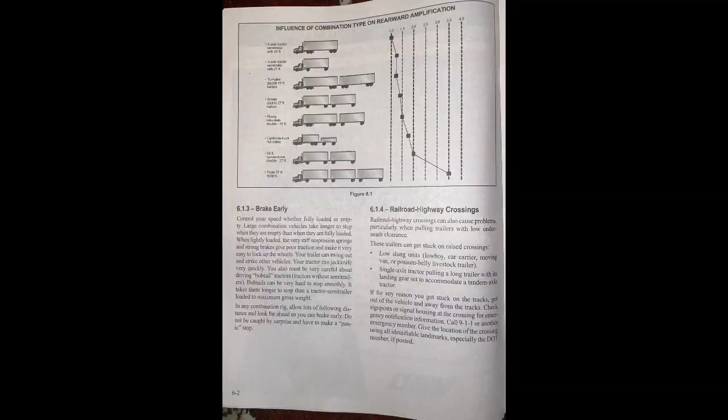6.1.5 Prevent trailer skids. When the wheels of a trailer lock up, the trailer will tend to swing around. This is more likely to happen when the trailer is empty or lightly loaded. This type of jackknife is often called a trailer jackknife. The procedure for stopping a trailer skid is: recognize the skid.

The earliest and best way to recognize that the trailer has started to skid is by seeing it in your mirrors. Anytime you apply the brakes hard, check the mirrors to make sure the trailer is staying where it should be. Once the trailer swings out of your lane, it is very difficult to prevent a jackknife.

Stop using the brake. Release the brakes to get traction back. Do not use the trailer hand brake, if you have one, to straighten out the rig. This is the wrong thing to do since the brakes on the trailer wheels caused the skid in the first place. Once the trailer wheels grip the road again, the trailer will start to follow the tractor and straighten out.

6.1.6 Turn wide. When a vehicle goes around a corner, the rear wheels follow a different path than the front wheels. This is called off-tracking or cheating. Off-tracking causes the path followed by a tractor to be wider than the rig itself. Longer vehicles will off-track more.

The rear wheels of the powered unit, truck or tractor, will off-track some, and the rear wheels of the trailer will off-track even more. If there is more than one trailer, the rear wheels of the last trailer will off-track the most. Steer the front end wide enough around a corner so the rear end does not run over the curb, pedestrians, etc. However, keep the rear of your vehicle close to the curb. This will stop other drivers from passing you on the right.

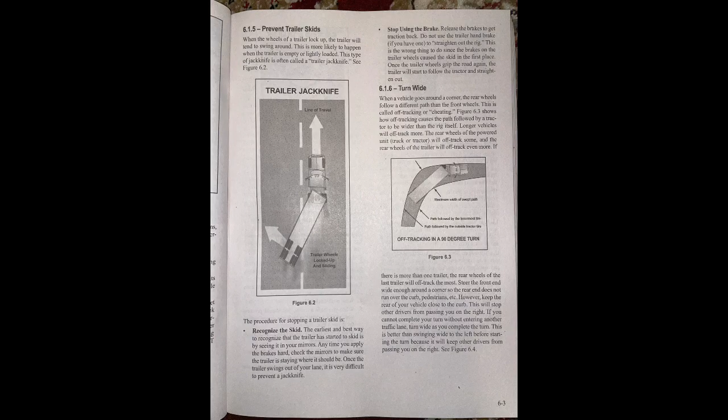6.1.7 Backing with a trailer. When backing a car, straight truck, or bus, turn the top of the steering wheel in the direction you want to go. When backing a trailer, turn the steering wheel in the opposite direction. Once the trailer starts to turn, turn the wheel the other way to follow the trailer. Whenever you back up with a trailer, try to position your vehicle so you can back in a straight line. If you must back on a curved path, back toward the driver's side so you can see.

Look at your path. Look at your line of travel before you begin. Get out and walk around the vehicle. Check your clearance to the sides and overhead, in and near the path of your vehicle. Use mirrors on both sides. Check the outside mirrors on both sides frequently. Get out of the vehicle and re-inspect your path if you are unsure.

Back slowly. This will let you make corrections before you get too far off course. Correct drift immediately. As soon as you see the trailer getting off the proper path, correct it by turning the top of the steering wheel in the direction of the drift. Pull forward. When backing a trailer, make pull-ups to reposition your vehicle as needed.

Subsection 6.1. Test your knowledge. 1. What two things are important to prevent a rollover? 2. When you turn suddenly while pulling doubles, which trailer is most likely to turn over? 3. Why should you not use the trailer hand brake to straighten out a jackknifing trailer? 4. What is off-tracking?

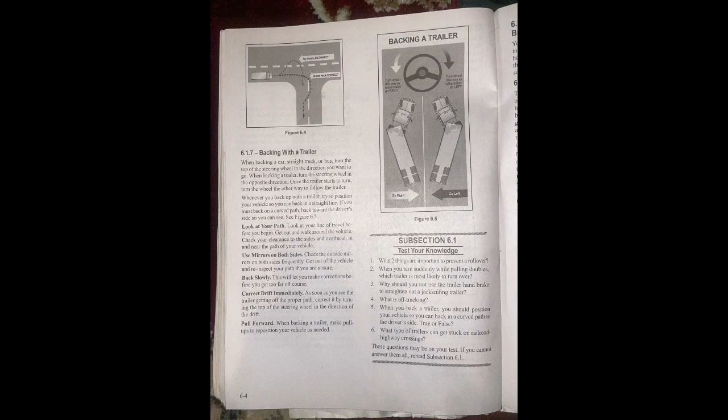6.2 Combination Vehicle Air Brakes. You should study Section 5, Air Brakes, before reading this. In combination vehicles, the braking system has parts to control the trailer brakes, in addition to the parts described in Section 5. These parts are described below.

6.2.1 Trailer Hand Valve. The trailer hand valve, also called the trolley valve or Johnson bar, works the trailer brakes. The trailer hand valve should be used only to test the trailer brakes. Do not use it in driving because of the danger of making the trailer skid. The foot brake sends air to all of the brakes on the vehicle, including the trailers. There is much less danger of causing a skid or jackknife when using just the foot brake.

Never use the hand valve for parking because all the air might leak out, unlocking the brakes, in trailers that do not have spring brakes. Always use the parking brakes when parking. If the trailer does not have spring brakes, use wheel chocks to keep the trailer from moving.

6.2.2 Tractor Protection Valve. The tractor protection valve keeps air in the tractor or truck brake system should the trailer break away or develop a bad leak. The tractor protection valve is controlled by the trailer air supply control valve in the cab. The control valve allows you to open and shut the tractor protection valve.

The tractor protection valve will close automatically if air pressure is low, in the range of 20 to 45 psi. When the tractor protection valve closes, it stops any air from going out of the tractor. It also lets the air out of the trailer emergency line. This causes the trailer emergency brakes to come on, with possible loss of control. Emergency brakes are covered later.

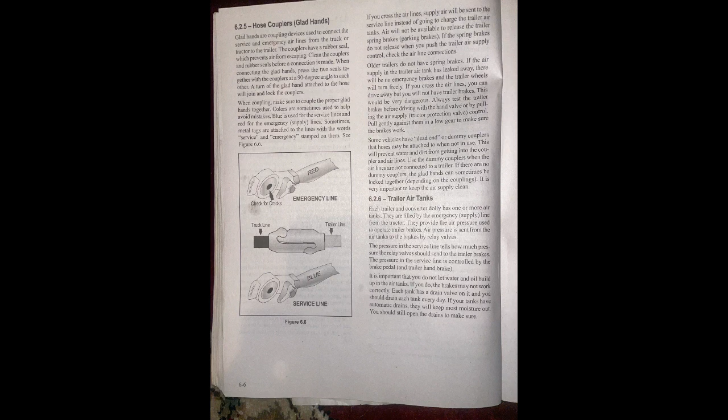6.2.7 Shut-off valves. Shut-off valves are used in the service and supply airlines at the back of trailers used to tow other trailers. These valves permit closing the airlines off when another trailer is not being towed. You must check that all shut-off valves are in the open position except the ones at the back of the last trailer, which must be closed.

6.2.8 Trailer service, parking, and emergency brakes. Newer trailers have spring brakes just like trucks and truck tractors. However, converter dollies and trailers built before 1975 are not required to have spring brakes. Those that do not have spring brakes have emergency brakes, which work from the air stored in the trailer air tank. The emergency brakes come on whenever air pressure in the emergency line is lost. These trailers have no parking brake. The emergency brakes come on whenever the air supply knob is pulled out or the trailer is disconnected.

A major leak in the emergency line will cause the tractor protection valve to close and trailer emergency brakes to come on. However, the brakes will hold only as long as there is air pressure in the trailer air tank. Eventually, the air will leak away and there will be no brakes. Therefore, it is very important for safety that you use wheel chocks when you park trailers without spring brakes. You may not notice a major leak in the service line until you try to put the brakes on. Then, the air loss from the leak will lower the air tank pressure quickly. If it goes low enough, the trailer emergency brakes will come on.

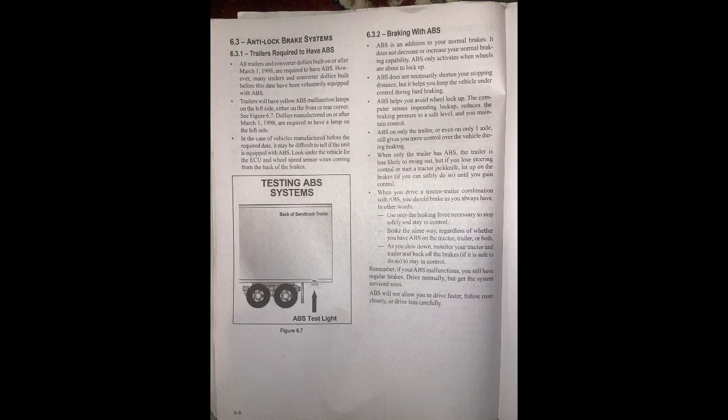6.4 Coupling and uncoupling. Knowing how to couple and uncouple correctly is basic to safe operation of combination vehicles. Wrong coupling and uncoupling can be very dangerous. General coupling and uncoupling steps are listed below. There are differences between different rigs, so learn the details of coupling and uncoupling the trucks you will operate.

6.4.1 Coupling tractor semi-trailers. Step 1. Inspecting the fifth wheel. Check for damaged and missing parts. Check to see that the mounting to the tractor is secure, no cracks in the frame, etc. Be sure that the fifth wheel plate is greased as required. Failure to keep the fifth wheel plate lubricated could cause steering problems because of friction between the tractor and trailer.

Check if the fifth wheel is in proper position for coupling. Wheel is tilted down towards the rear of the tractor. Jaws are open. Safety unlocking handle is in the automatic lock position. If you have a sliding fifth wheel, make sure it is locked. Make sure the trailer kingpin is not bent or broken.

Step 2. Inspect the area and chock the wheels. Make sure the area around the vehicle is clear. Be sure the trailer wheels are chocked or spring brakes are on. Check that the cargo, if any, is secured against movement due to the tractor being coupled to the trailer.

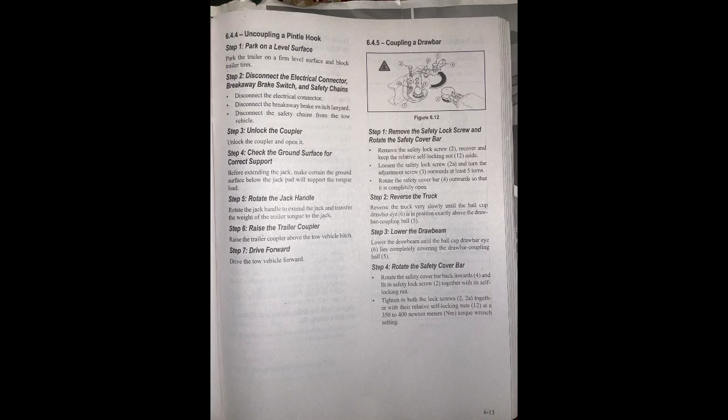Step 4. Rotate the safety cover bar. Rotate the safety cover bar back inwards and fit in safety lock screw together with its self-locking nut. Tighten in both the lock screws together with their relative self-locking nuts at a 350 to 400 Nm torque wrench setting. Step 5. Adjust the adjustment screw.

Adjust the adjustment screw until a 0.3 to 0.5 mm vertical clearance between the guard disc and the ball cup is reached. Lock the setting with counter nut. In the event that the safety cover bar will not perfectly lodge into its seating appropriately, travel is strictly forbidden.

Step 6. Protect the coupling ball and anchor the edge onto ball. Protect the part that is still visible of the coupling ball with the rubber dust-proof bellows protection cover. Accurately anchor the edge directly onto the ball itself. Step 7. Lubricate the drawbar eye. Lubricate the inside of the drawbar eye ball cup directly through the grease nipple.

6.4.6 Uncoupling a drawbar. Step 1. Turn the trailer brake on. Make sure that the trailer brake is on. Step 2. Remove the cover and loosen the screws. Remove the rubber dust-proof bellows protection cover. Loosen the adjustment screw in the counter nut. Loosen safety lock screw and remove safety lock screw together with its self-locking nut.

Step 3. Rotate the safety cover bar and lift trailer drawbeam. Rotate the safety cover bar outwards so that it is completely open. Lift the trailer drawbeam until the drawbar coupling ball is fully visible, and then travel forward with the trailer very slowly. Rotate the safety cover bar inwards until it lodges back in its housing. Step 4. Lock the safety screw and tighten the self-locking nut. Fit in the safety lock screw and tighten in the self-locking nut.

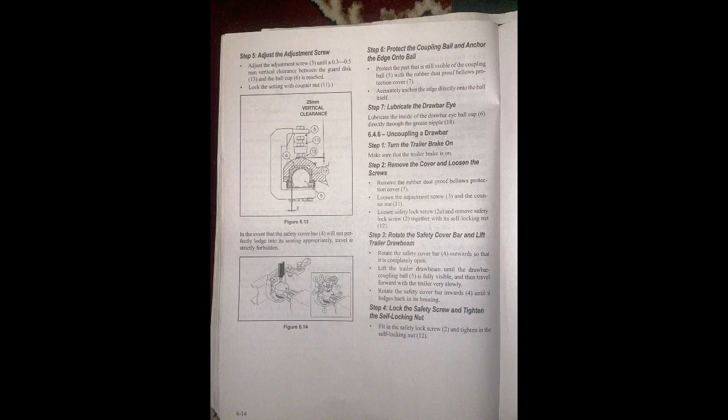6.4.7 Coupling a gooseneck hitch. If you are hooking up a gooseneck or a fifth wheel hitch, the procedure is a little different from a receiver and ball, but it is not complicated. Step 1. Open the latch and lubricate the gooseneck ball. Open the clamp latch on the gooseneck coupler. Make sure that the gooseneck ball is properly lubricated. Step 2. Position the coupler and latch the clamp. Position the trailer's coupler directly over the ball. Lower the gooseneck trailer into position. Latch the clamp.

Step 3. Attach the safety chains. Attach your safety chains. Remember that all trailers are required by law to have safety chains. Step 4. Connect the trailer light wiring. Connect your trailer light wiring to your vehicle's connector. Check all of your lights, including your brake lights. Step 5. Lower and stow the trailer jacks. Completely lower and stow the trailer jacks, allowing the weight to settle onto the tow vehicle.

6.4.8 Uncoupling a gooseneck hitch. Step 1. Remove the safety pin and clip. Simply remove the safety pin and clip. Step 2. Rotate the handle and raise the trailer off the ball. Rotate the handle to this position and raise the trailer off the ball. The coupler will return to the load position automatically. Step 3. Install the safety pin and clip. Install the safety pin and clip.

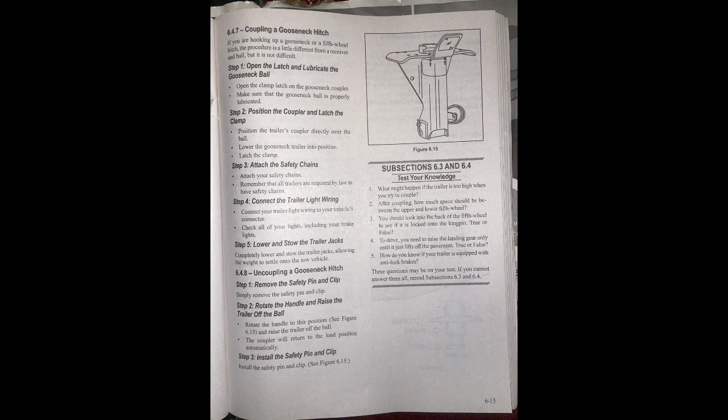Subsection 6.3 and 6.4. Test your knowledge. 1. What might happen if the trailer is too high when you try to couple? 2. After coupling, how much space should be between the upper and lower fifth wheel? 3. You should look into the back of the fifth wheel to see if it is locked onto the kingpin. True or false? 4. To drive, you need to raise the landing gear only until it just lifts off the pavement. True or false? 5. How do you know if your trailer is equipped with anti-lock brakes? These questions may be on your test. If you cannot answer them all, reread subsections 6.3 and 6.4.

6.5 Inspecting a combination vehicle. Use the 7-step inspection procedure described in Section 2 to inspect your combination vehicle. There are more things to inspect on a combination vehicle than on a single vehicle, for example, tires, wheels, lights, reflectors, etc. There are also some new things to check. These are discussed below. 6.5.1 Additional things to check during a walk-around inspection. Do these checks in addition to those already listed in Section 2.

Coupling system areas. Check the fifth wheel, lower. Is securely mounted to the frame. Has no missing or damaged parts. Has enough grease. Has no visible space between the upper and lower fifth wheel. Locking jaws are around the shank, not the head of the kingpin. Release arm is properly seated in the safety latch, lock is engaged. Check the fifth wheel, upper. Glide plate is securely mounted to the trailer frame.

Kingpin is not damaged. Check the air and electric lines to the trailer. The electrical cord is firmly plugged in and secured. Air lines are properly connected to the glad hands, no air leaks, and properly secured with enough slack for turns. All lines are free from damage. Check the sliding fifth wheel. The slide is not damaged or parts missing. Is properly greased. All locking pins are present and locked in place. If air-powered, there are no air leaks.

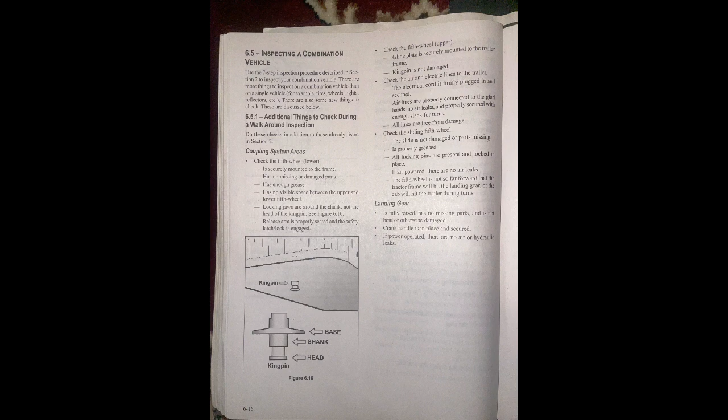6.5.2 Combination vehicle brake check. Do these checks in addition to Section 5.3, Inspecting air brake systems. The following section explains how to check air brakes on combination vehicles. Check the brakes on a double or triple trailer as you would any combination vehicle.

Check that air flows to all the trailers. Use the tractor parking brake and/or chock the wheels to hold the vehicle. Wait for air pressure to reach normal, and then push in the red trailer air supply knob. This will supply air to the emergency supply lines. Use the trailer handbrake to provide air to the service line.

Go to the rear of the rig. Open the emergency line shut-off valve at the rear of the last trailer. You should hear air escaping, showing the entire system is charged. Close the emergency line valve. Open the service line valve to check that service pressure goes through all the trailers. This test assumes that the trailer handbrake or service brake pedal is on, and then close the valve.

If you do not hear air escaping from both lines, check that the shut-off valves on the trailers and dolly(s) are in the OPEN position. You must have air all the way to the back for all the brakes to work.

Test the tractor protection valve. Charge the trailer air brake system, that is, build up normal air pressure and push the air supply knob in. Shut the engine off. Step on and off the brake pedal several times to reduce the air pressure in the tanks. The trailer air supply control, also called the tractor protection valve control, should pop out, or go from normal to emergency position, when the air pressure falls into the pressure range specified by the manufacturer, usually within the range of 20 to 45 psi.

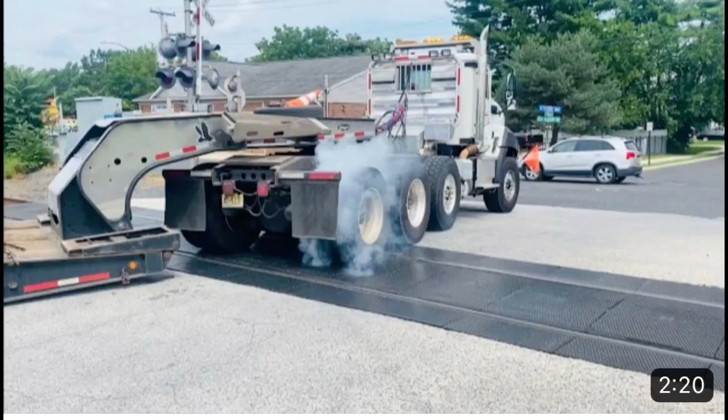Question 6, subsection 6.1. What type of trailers can get stuck on railroad highway crossings? Low-slung units such as lowboy, car carrier, moving van, possum-belly livestock trailer, and a single-axle tractor pulling a long trailer with its landing gear set to accommodate a tandem axle tractor. This is what happens with lowboy trailers that are not lifted all the way. There is a joystick on the trailer near the hitch that raises and lowers the front end of the trailer.

Question 1 of subsection 6.2. Why should you not use the trailer hand valve while driving?

The danger of making the trailer skid. Don't ever press that red button unless you're testing the brakes. The trailer hand valve is also that red trailer air supply button. You don't ever press that while driving.

Question 2, subsection 6.2. Describe what the trailer air supply control does. When you push in the red button, it supplies air to the trailer. When you pull out on the red button, it shuts off the air and puts on the trailer's emergency brakes. If you pull on the yellow knob, it'll automatically also pull out the red knob. The trailer air supply button, red button, should only be used when the vehicle is parked and being tested.

Question 3, subsection 6.2. Describe what the service line is for. The service line carries air, which is controlled by the foot brake or the trailer handbrake. Question 4 of subsection 6.2. What is the emergency air line for? Supplies air to the trailer air tanks. Controls the emergency brakes on combination vehicles.

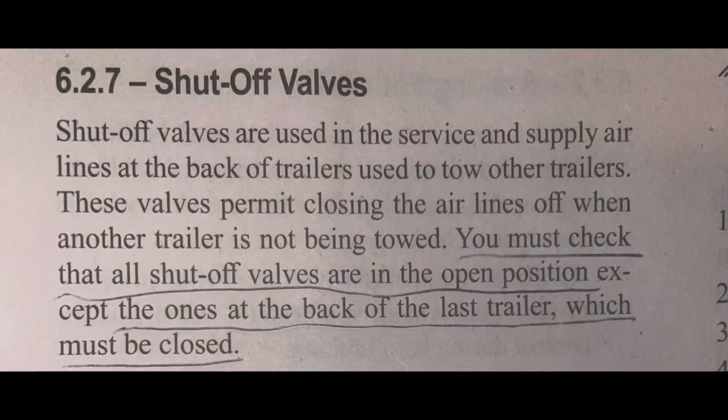Question 1 of subsection 6.3 and 6.4. What might happen if the trailer is too high when you try to couple? It may not couple correctly. Question 2 of subsection 6.3 and 6.4. After coupling, how much space should be between the upper and lower fifth wheel? There should be no space between the upper and lower fifth wheel.

Question 3 of subsection 6.3 and 6.4. Should you look into the back of the fifth wheel to see if it is locked onto the kingpin? Yes, you should always be safe and check the kingpin. Question 4 of subsection 6.3 and 6.4. To drive, you need to raise the landing gear only until it just lifts off the pavement. True or false? The answer to question 4 is false, or no. You need to raise the landing gear up all the way while you're driving.

Question 1 of subsection 6.5. Which shutoff valve should be open and which should be closed? The emergency line valve should be closed, the service line valve should be closed, and the shutoff valves to the trailers and dollies should be open. Question 2 of subsection 6.5. How can you test that air flows to all trailers? To test if air flows into the trailers, use the parking brake and or chock the wheels, then wait for the normal air pressure. Push in the trailer air supply knob, and that is how you test to see if air flows to the trailers.